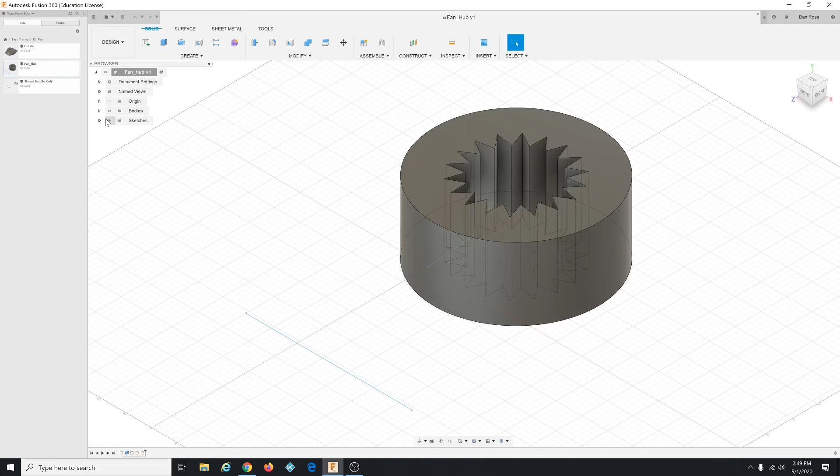I'll move these instructions off to the side and open Fusion, go to the data panel, go to basic training, and it's patch, folder, and then fan hub. Okay, you get this thing here. Let's see what we got. We got a bunch of sketches.

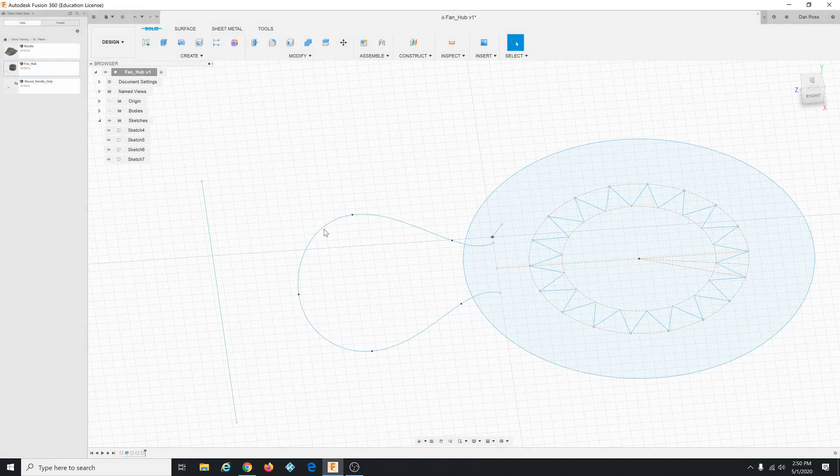I'll hide the body and just look at the sketches, make sure I turn them all on there. So there's one that kind of pokes up from the plane, that little blue one, and then you've got several that are in the plane, this one and this one, and then this one here has already been extruded to create this body right here. So that's what's going on. Now we're just going to make a blade.

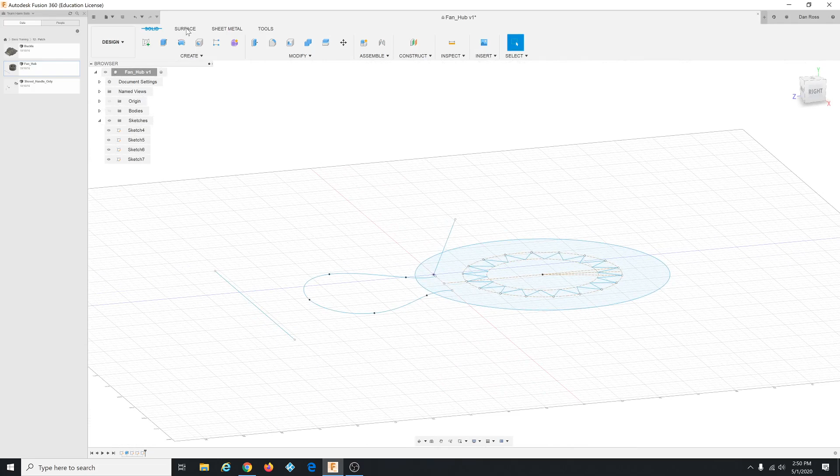I'm going to hide the body. Let's get it like this in this orientation so you can see what's happening. We're going to go to the surface commands, create a loft is the first thing, and pick this line and this line. And that's it. I have bodies turned off so you couldn't see it, but there, that's what it did. If it would have had bodies on, you would have seen it during the command.

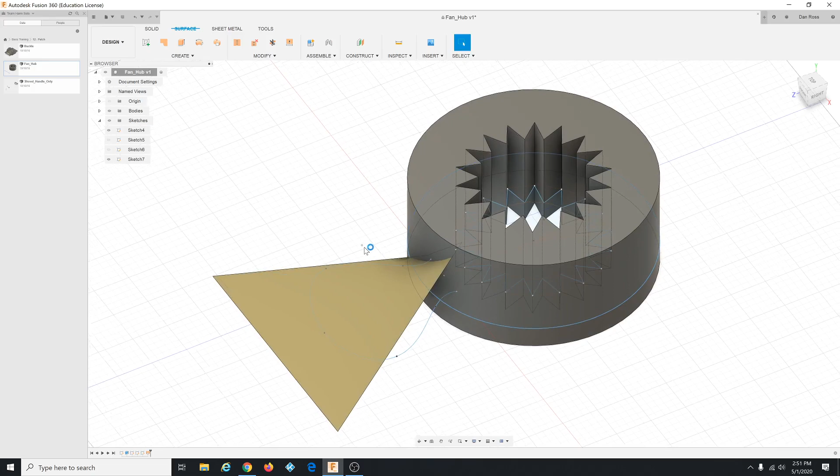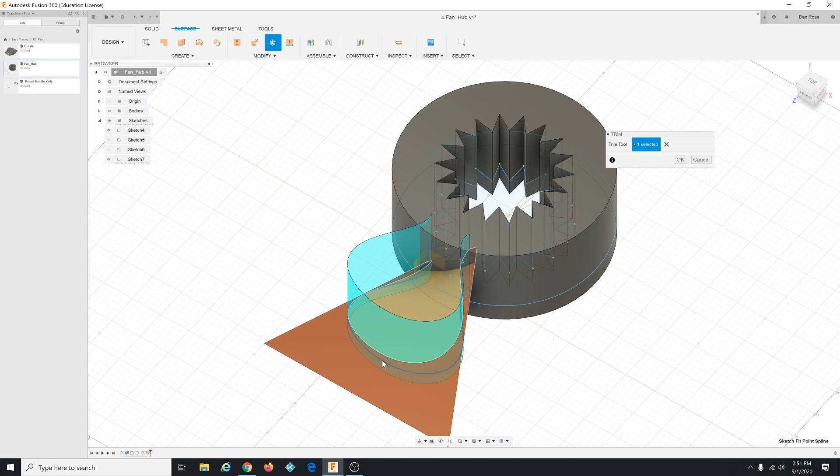But there's that. Then we want to trim it, using this curve right there, that thing. So go to modify, trim. The trim tool is this curve right here, and the surface we want to trim is this area right here. Click that and it turns red. Click OK and it's trimmed.

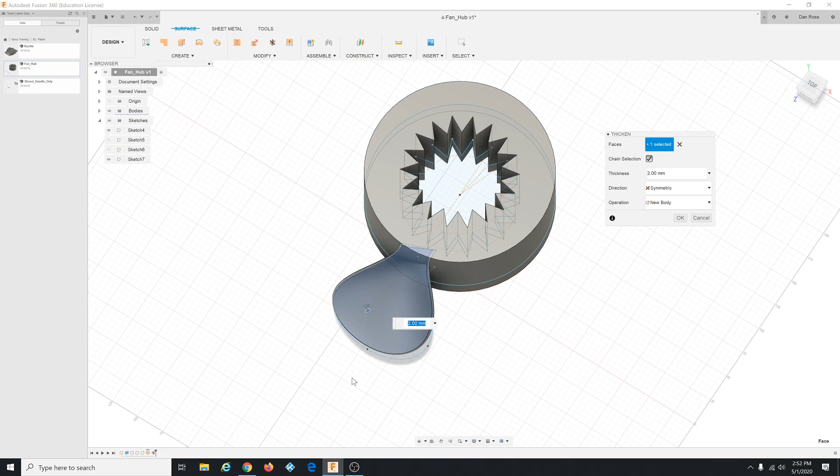Then we want to thicken this. So we go to create, thicken this surface, 2 millimeters symmetric. You can get in here with the camera and see how symmetric is what it's doing here. There's this surface in the middle and it's offsetting it to each side, 2 millimeters to each side. Click OK, we've got that.

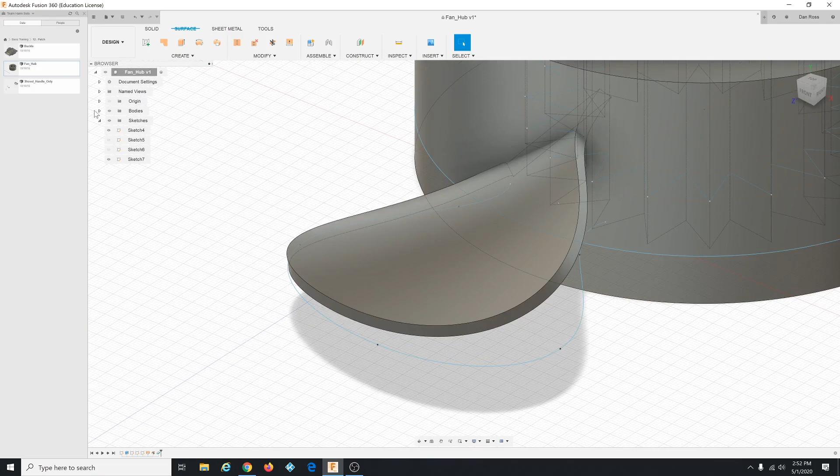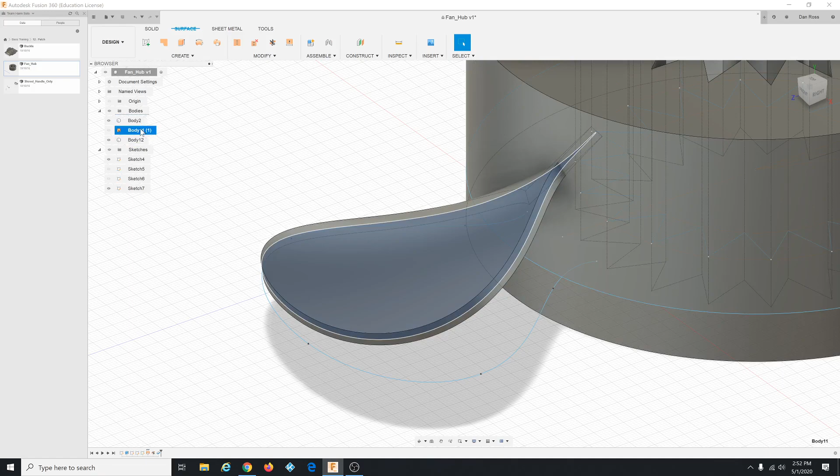So it made a new body called body 12, which is a component—no, it's just a body. That's the body symbol. But the thing we used to make the body is this body 11 sub 1, that's the surface in between. So we use this body 11-1 to surface to make this body 12. I'm just trying to keep the terminology straight here. I think that's important for this tool.

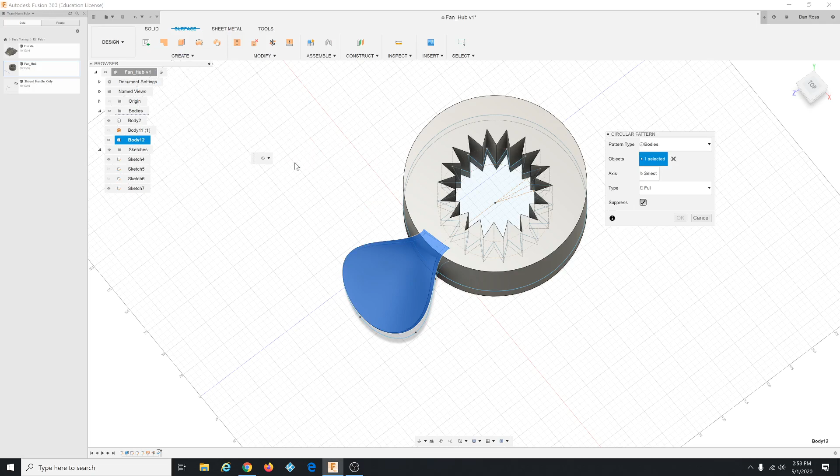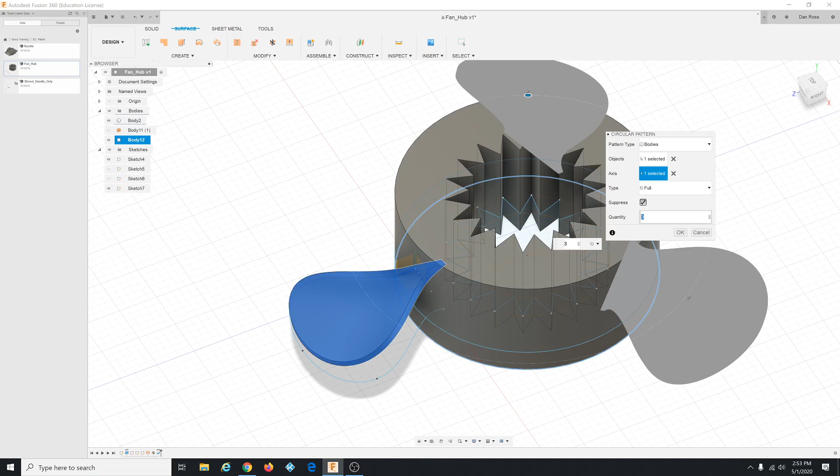All right, the next thing is a circular pattern. So we go create, pattern, circular pattern, and we want to make sure body 12 is the object that's selected. We could cancel out of that and click body 12 again. And then the axis, we want this bottom circle here, and it does that, and then you can change the quantity to 8 and click OK. So that's making the blades.

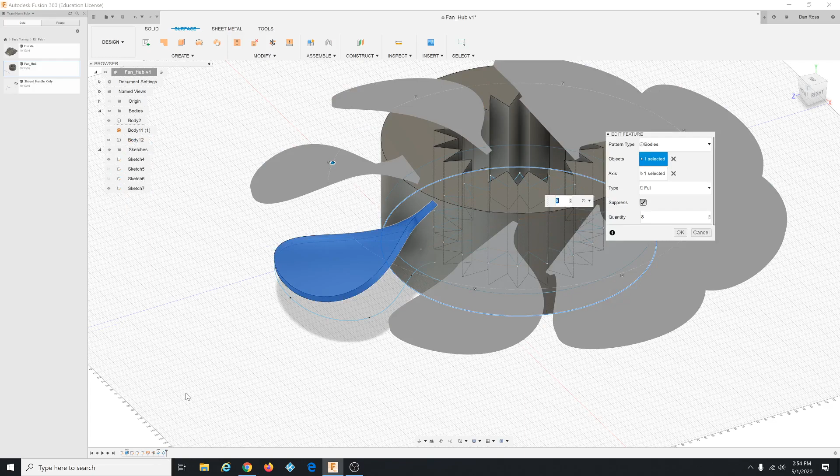Now we're going to modify the blades. So there's this timeline down here with all of these operations we did. The last one we did was this circular pattern thing, so they want you to right click that and go to select edit. Then you can type in 5 on the quantity and click OK. It changes all of that.

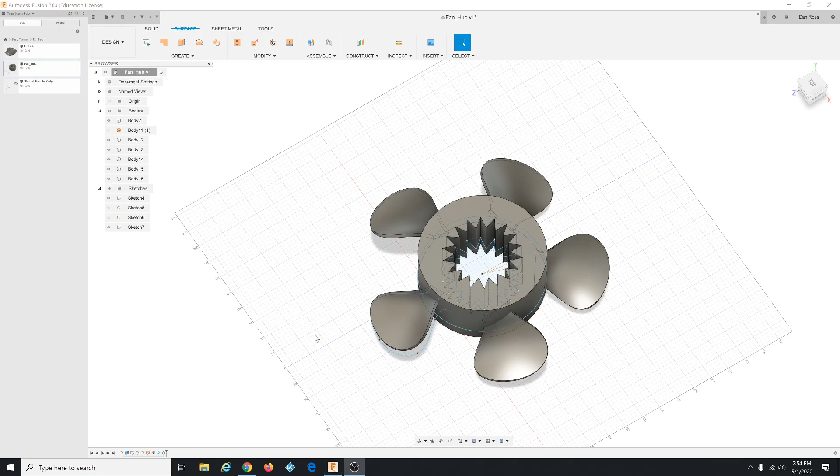Now what they want you to do is make these blades bigger by offsetting the perimeter curve. You have to be careful you're extending the right thing, which is the body 11-1 surface indicated by this orange icon up in here. Make sure you're extending that and not the body that was created from that, but the original surface. So you go to modify, extend.

I'm just going to click body 11-1 in the browser. Oh, it's not visible, turn it visible, click it to select it. I think it's selected. No, it's not. Oh, I got to pick the edge on it. So you've got to make sure it's visible in the browser, and then get over here and grab—let me zoom in—grab this edge right here. That's the one you want.

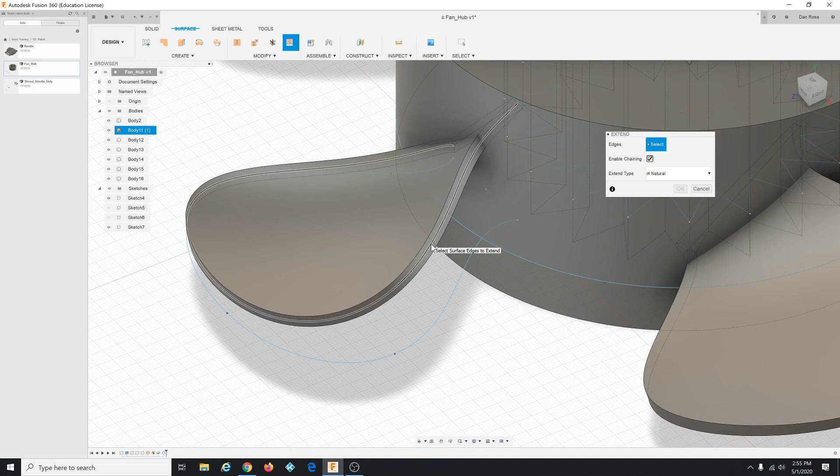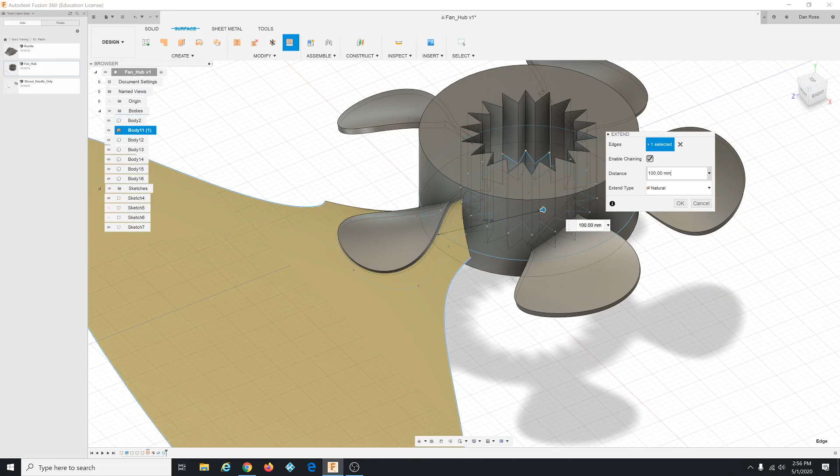Oh wait, I almost did it wrong. Look, if I do this right now, it's going to only affect this one blade because the timeline is all the way at the end. So I could do that. Let's see, then I need to undo it. I'll do that, so watch, you click this. Ooh, 100, way too much. 20, all right, then click OK. Now it only affected that one blade, which is not what I want. So you Control Z to undo that. And then here, now roll the timeline back, grab this little timeline and roll it back before the thicken command.

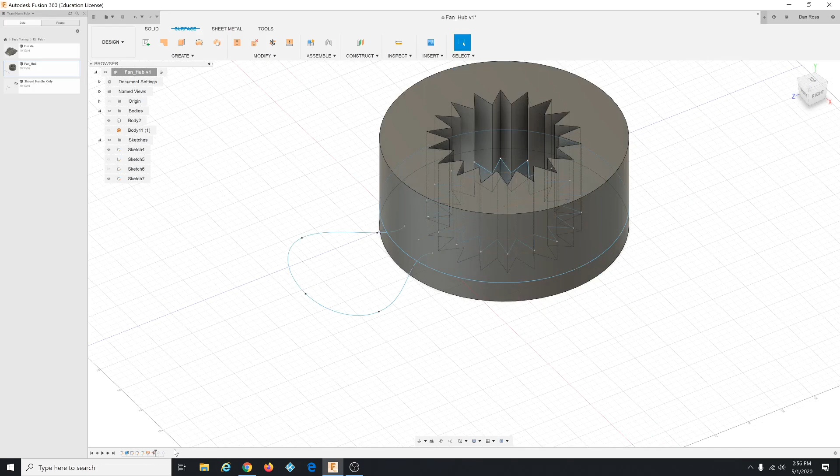Turn visibility on body 11-1 surface back on. Okay, now we're going to do it right. So modify, extend, click this surface, this edge rather, the edge of this surface.

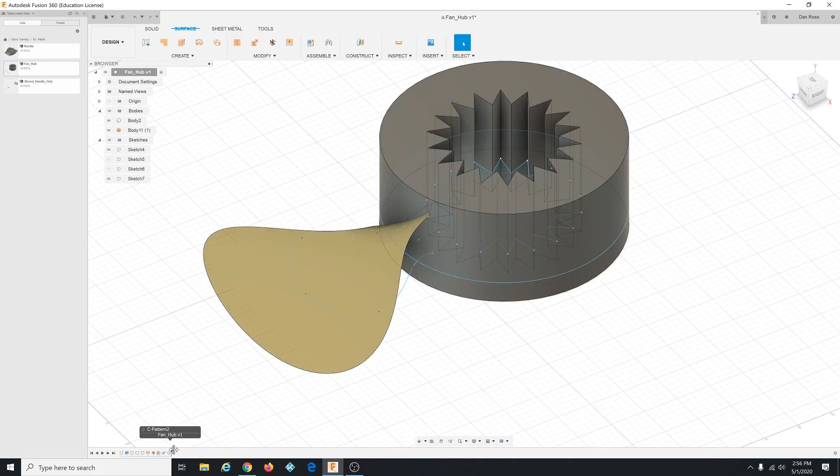20 is what we want. Click OK. Now when we go back down here to the timeline, hover over this thing and drag it over to the end. See, it changes all 5 blades. So that's pretty cool.

So the timeline, basically what happened here - it seems to be a little bit inconsistent to me, because when you have sketches, you change objects in the sketch, it affects everything. But that's not what's happening here. If we did a new operation with the timeline at the very end, it would only affect that one thing.

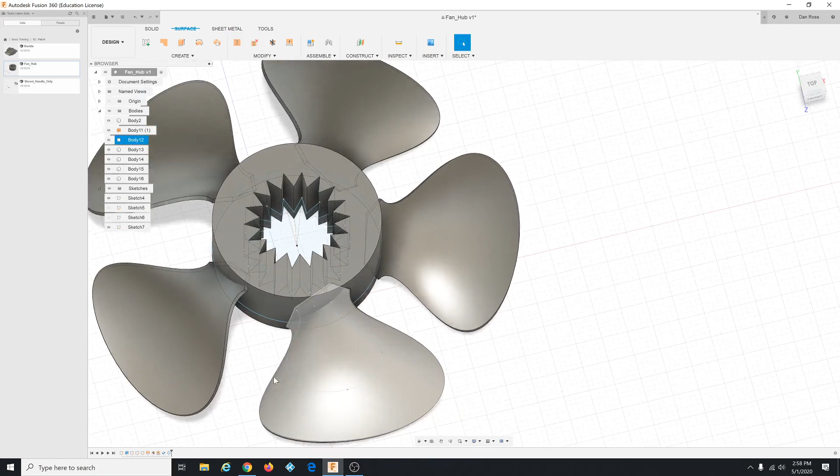But if you roll the timeline back, then it affects all those things after that. So I don't know, I'm not sure exactly. It seems a little bit inconsistent. It seems like it only applies to operations in the timeline, whereas for sketches it seems to apply to everything. I think at this point in my understanding, that seems to be what's happening. Could be wrong, but keep that in mind. Be thinking about that when you're doing this, okay?

As you're trying to make sense of this tool, be thinking about that. All right, so we're going to roll the timeline back again and do another extend. So I'll grab this thing and I'll roll the timeline back before the thicken command, and I get this.

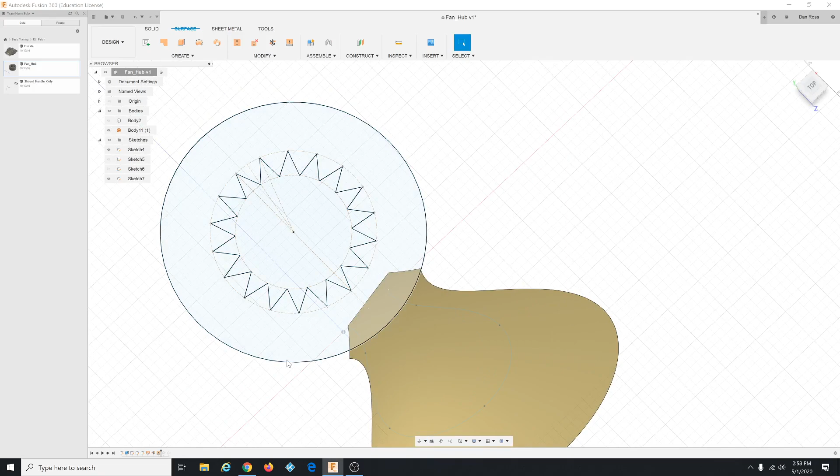Now I'm going to turn off body 2 just for visibility. In fact, I think I'll turn off sketch 4 too. And we want to get in here where we can see what's going on. Oh, sometimes my mouse goes crazy.

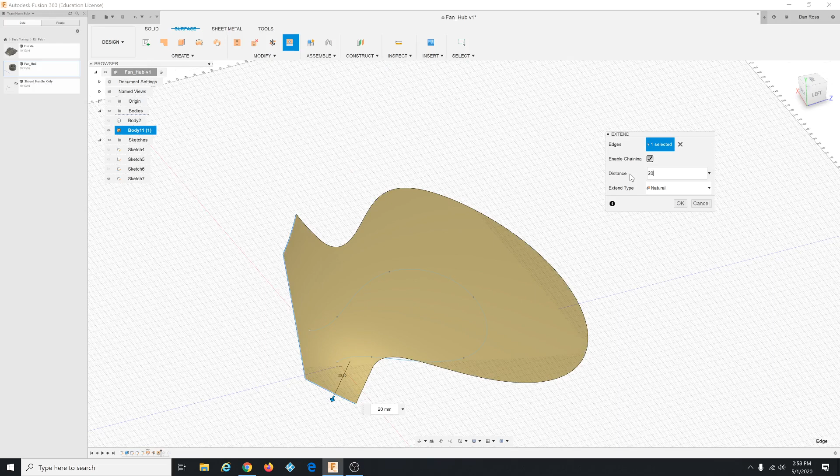Okay, modify, extend. We want to pick this thing and hold down Control. Pick that one, and that one. And when you let go of Control, it'll do whatever number's in there now. And we want 20 - well, not 10, 20. Right? And click OK.

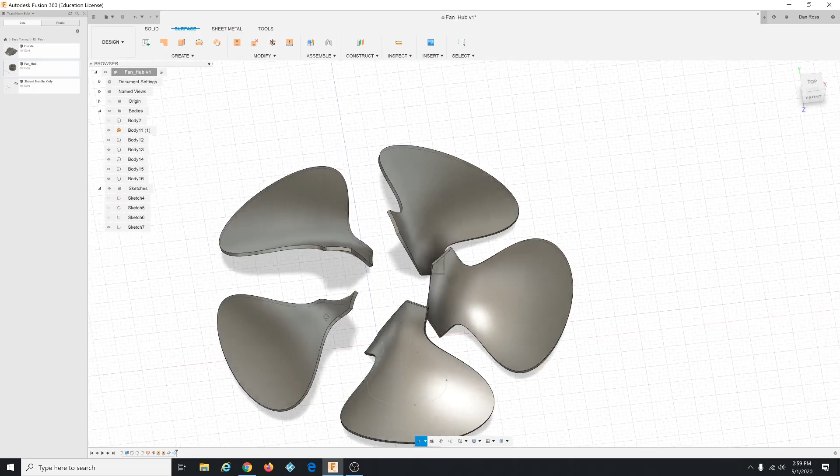Now, once again, because we rolled back the timeline, when we roll it all the way to the end, that extend that we just did on this edge up in here affects all the geometry that was created after that. So I guess once you get the hang of it, it makes sense, but I'm still trying to make it make sense to me because I'm used to other tools that operate a little bit differently.

Anyway, I think that's it. Let me turn the body back on. And that's the whole lab. Oh wow, totally stick out. I think I extended it too much. I did. So let's go back.

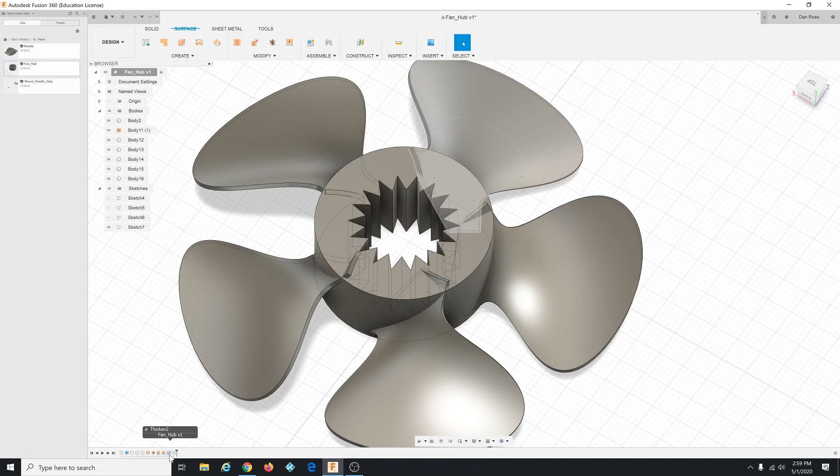Oh, I could just edit. I should be - well no. What do? It's an extend, which doesn't even show up in here. The trims show up. Oh, there it is. I think that was the second extend. Let me see if I can edit that edit feature.

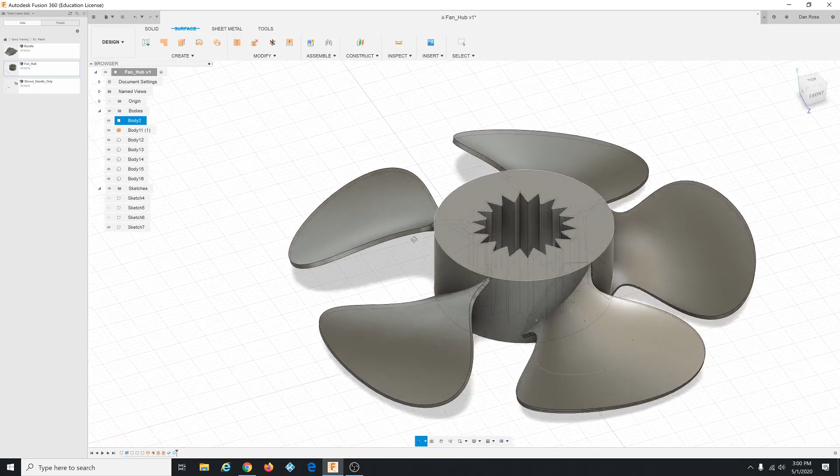Let me see if I can make it 10 now. I hope it affects all of them and not just one of them. Did it? It did, it affected all of them. But I didn't roll the timeline back.

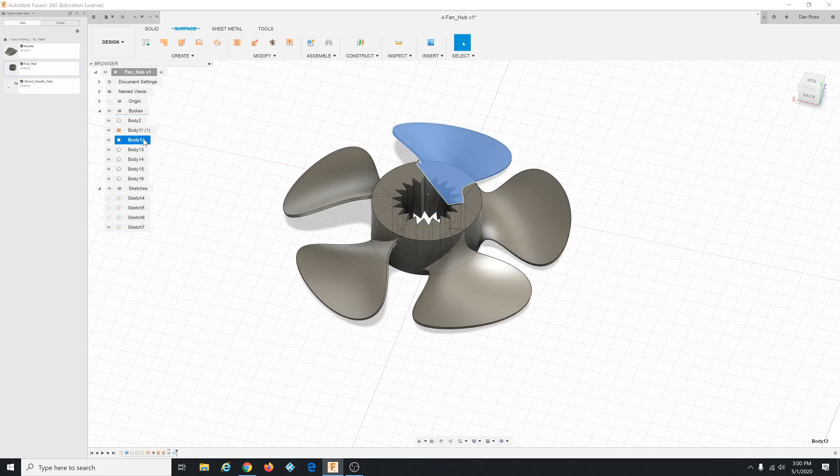Whatever, all right, that was a lab. Then to make sure that we did it right, they ask you to pick one of these bodies - no, this one, one of these propellers. I guess any one would do.

You could right click it even, except you want the body, not the - you want to make sure you're grabbing the body and not the surface. Well, if there's 5 bodies and only 1 blade, you don't want this, or 1 surface. You don't want body 11, because that's just a surface.

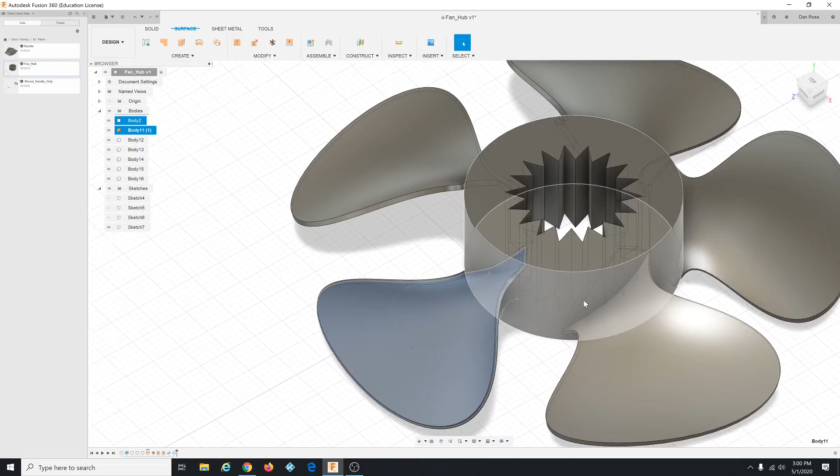In fact, let's check that. Right now I have body 11, which is a surface. If I right click on it and check properties, I get this area which is half what they want it to be, which is suspicious, right? So if I cancel out of that and I go to one of the blades and right click and go properties, I get the area they want.

Pretty close. They're asking for 3.85, and this is 4.02, which is close. It's the total area around the perimeter and everything. Close enough. Okay, that's the lab. I hope this was helpful to you. See you next time.